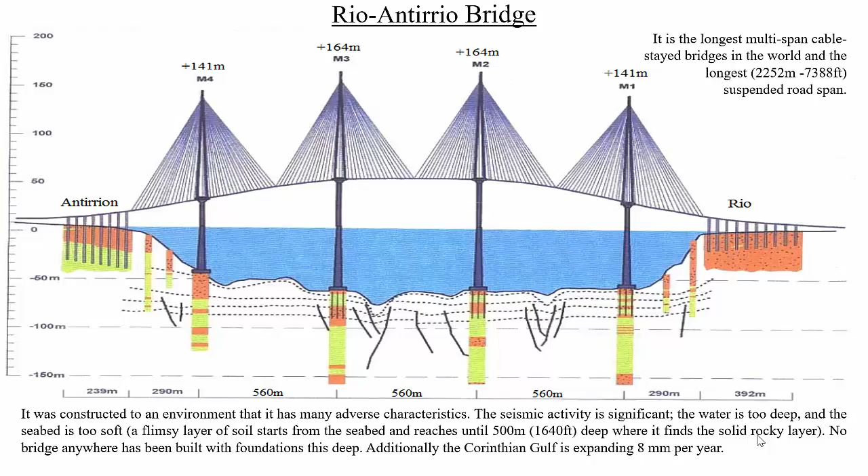The seismic activity is significant, the water is too deep, and the seabed is too soft. Additionally, the Corinthian Gulf is expanding 8 millimeters per year. Now my colleague is going to talk about the challenges. One of the major challenges for the Rio-Antirrio Bridge was that it had to be completed in 5 years, as well as the tower's enormous weight had to be dispersed throughout the seabed.

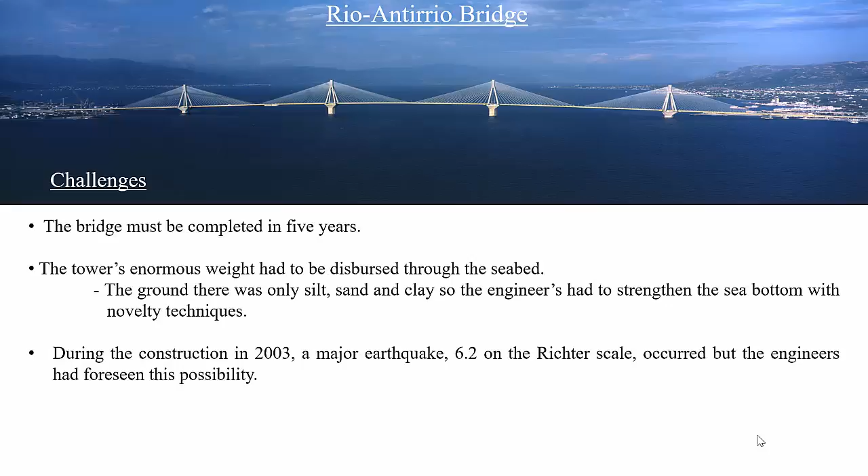Also, during construction in 2003, a major earthquake with a 6.2 on the Richter scale occurred, but the engineers had foreseen this possibility. The margin for error for the placement of the towers for the bridge was only 10 centimeters or 4 inches. During the placement of the first tower, they had an accident and the tower was actually displaced 30 centimeters from the original design position. Next, my colleague Dan is going to talk about the solutions.

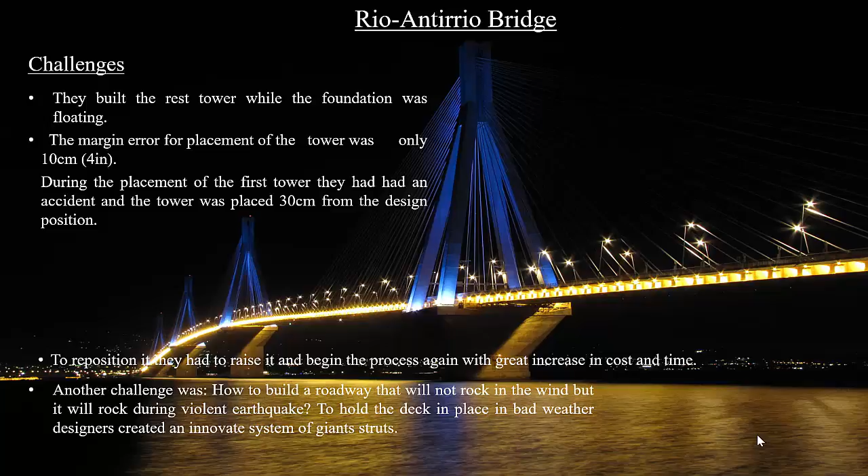One of the many solutions and achievements of the Rio-Antirrio Bridge is that it was delivered 4 months ahead of schedule. The tower's foundation, which was 90 meters in diameter, was built at shore to ease construction. Due to the unfavorable conditions of the seabed, engineers stabilized the ground under each tower by embedding hundreds of metal pipes using GPS. Due to the misplacement of the column, as stated previously, they decided to shift the whole bridge rather than move the column.

To account for the possibility of earthquakes, huge metal beams were temporarily installed to support the legs of each tower. The tower is not anchored to the seabed in any way. It simply rests on 3 meters of gravel that will allow it to slide in case of an earthquake. Now I'm sending it to the rest of our group, which covered the other bridge.

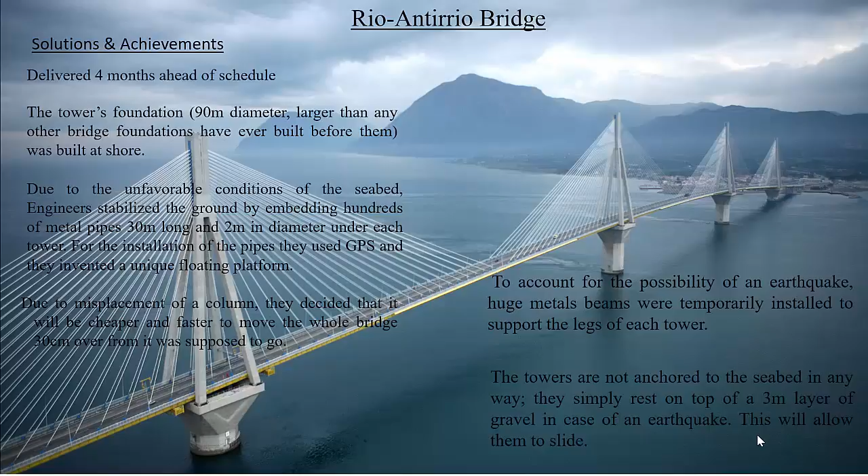Our friends Dan, Costas and Brian highlighted the engineering challenges faced during the construction of a major bridge project. Now we'll take you from building one bridge to demolishing one. Hi, I'm Ankit Singh and I'll provide a brief introduction of the Carquinez Bridge breakdown. Hi, I am Ayush. I will explain the challenges faced by engineers during the demolition of the Carquinez Bridge. Hi, I am Sanket and I'll elucidate the ingenious solution the engineers came up with to demolish the bridge.

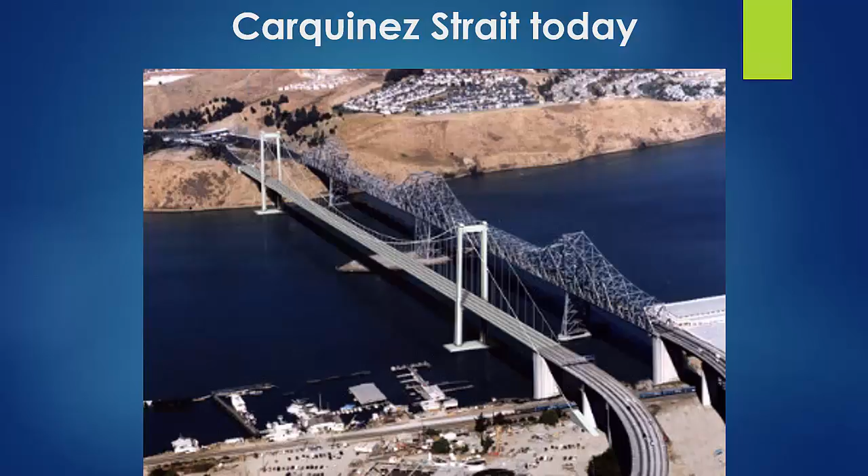Bridges are the lifeline of the San Francisco Bay Area. 7 bridges, including the iconic Golden Gate Bridge, connect the two shores. As of now, there are 2 bridges spanning the Carquinez Strait. One is a steel truss bridge built in 1958 and the other is a suspension bridge built in 2003. But before the year 2005, there was also a third steel bridge which was built in 1927 and served the traffic for nearly 8 decades.

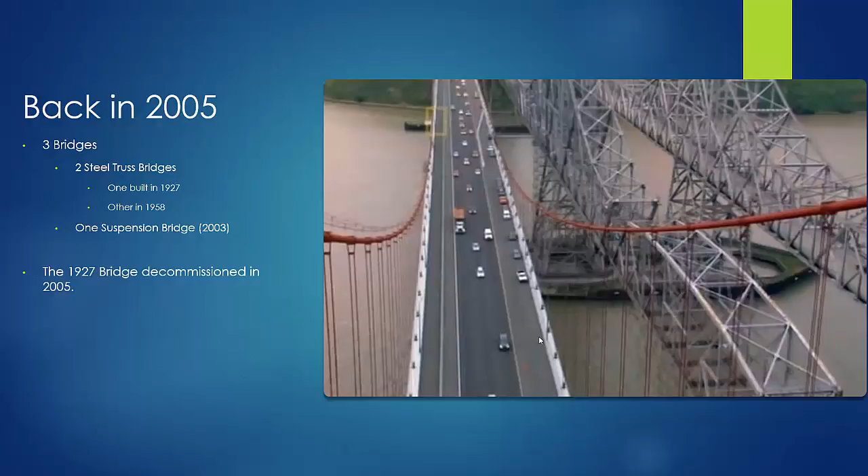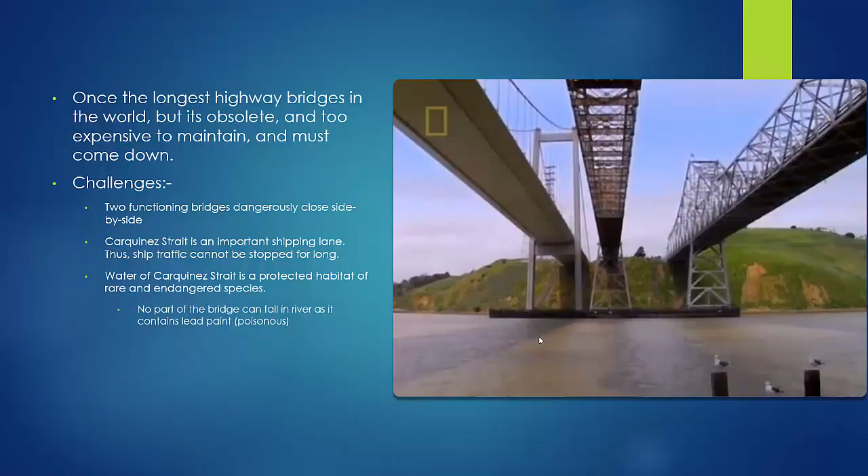The 1927 Carquinez Bridge was once the longest highway bridge in the world, but it is now obsolete and very expensive to maintain, and thus it must come down. The easiest way to quickly and economically demolish a steel bridge is by planned demolition using explosives and detonators, but that could not be done in this case because, firstly, two functioning bridges were dangerously close side by side.

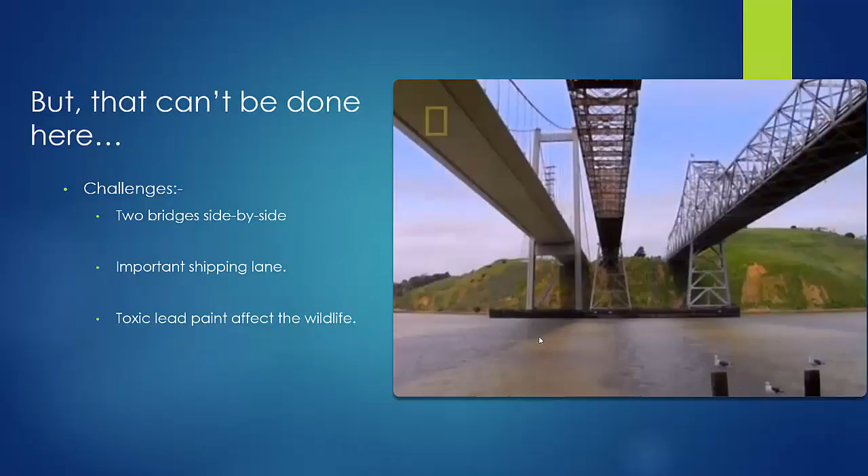Secondly, Carquinez Strait is an important shipping lane, thus ship traffic cannot be stopped for long. To further make things difficult, the water of Carquinez Strait is a protected habitat of rare and endangered species, and thus no part of the bridge can fall in the river as it contains toxic lead paint. In order to take down such a special bridge, a special solution was required.

To accomplish this Herculean task, the engineers thoroughly studied the construction technology used 80 years ago and just reversed the process to demolish it. Firstly, the pavement was stripped off the bridge. The solution was to bring each 630-ton central span down using hydraulic jacks and cables and then tow them to the shore using barges and tugboats, which wasn't that easy as there was less than 6-meter clearance from the shore.

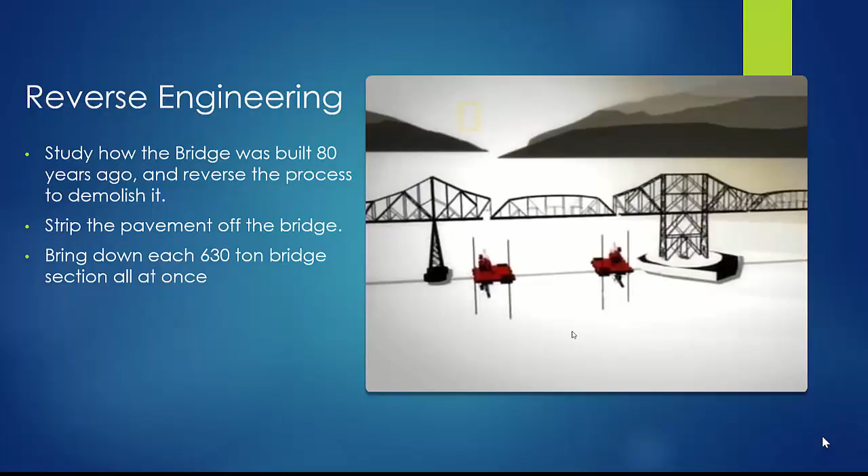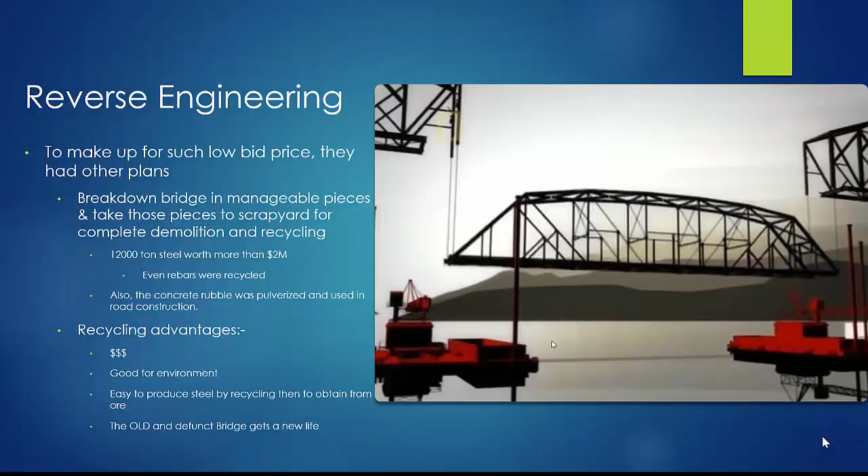A key aspect of the solution was recycling. The remaining steel structure was taken down by breaking it into manageable pieces and towed to the scrapyard. They recycled around 12,000 tons of steel, which was worth more than $2 million. Even the rebars were recycled and the concrete was pulverized and used for road construction. The advantages were it was environmentally friendly, the old defunct bridge got a new life, and the steel was easier to produce by recycling rather than obtaining it from the ore.